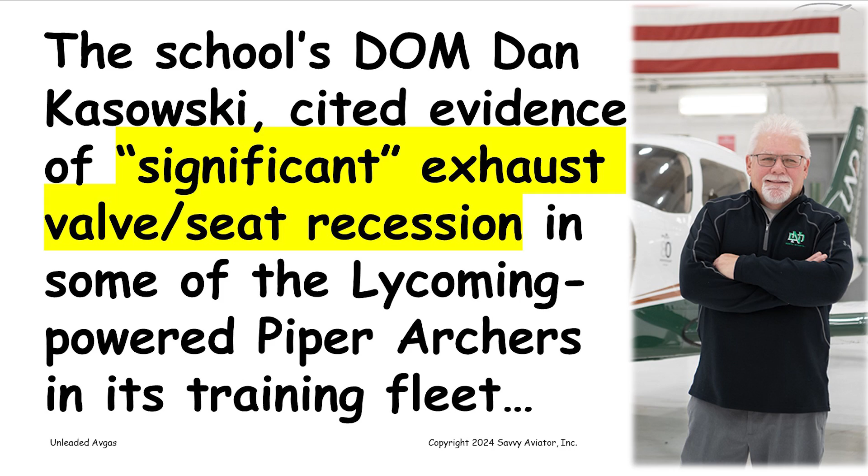And we wanted to find out why. When UND announced that they were going back to 100 low lead, the director of maintenance put out a press release citing that they had evidence of significant exhaust valve seat recession in some of the Lycoming-powered Piper Archers in its training fleet. The director of maintenance went on to say that they were pulling the plug on the Swift UL94. Didn't really provide any more information about what significant recession meant, how significant it was. And we now have some more information about that, but not as much as it would be nice to have.

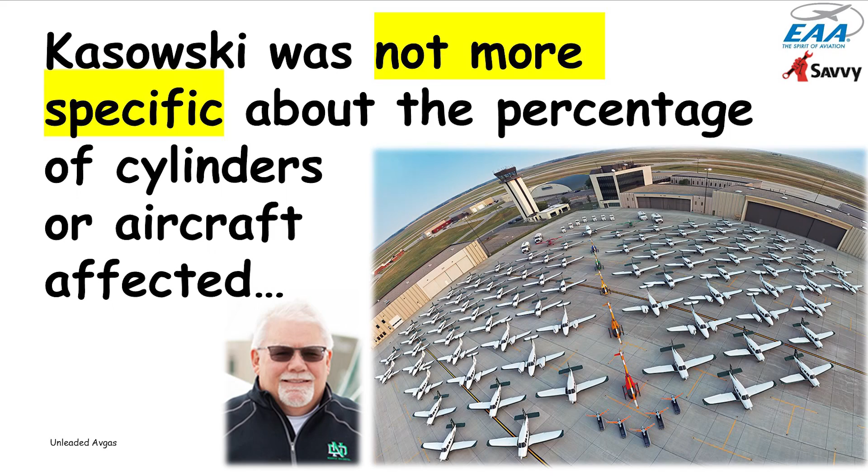So this got a lot of us looking at this whole question of valve recession and whether leaded fuel is required to avoid valve recession, and so on. A couple of weeks ago, we got some more information. The new dean of the UND School of Aerospace Sciences, Dr. Krause, reached out to me and sent me some more specific information that helped quantify the problem a little bit and gave an idea of just what a large test this was. And I'll run over some of that information with you right now.

This is the latest information that we have. At any rate, the UND fleet, UND has 1,600 primary flight students, so it's a very big flight school, one of the largest in the country. Their training fleet consists of 86 Piper Archers and 14 Piper Seminole twins, plus 5 Robinson helicopters, which I don't think were part of this. They put on over 100,000 hours a year on these airplanes. In some months, when they're peak flying months, they'll sometimes exceed 13,000 hours per month.

And some of their aircraft will fly in excess of 1,200 hours per year. So they fly the heck out of these airplanes. They put a lot of hours on it. They use a lot of fuel, and they're all 4-cylinder Lycoming engines in these Archers and Seminoles.

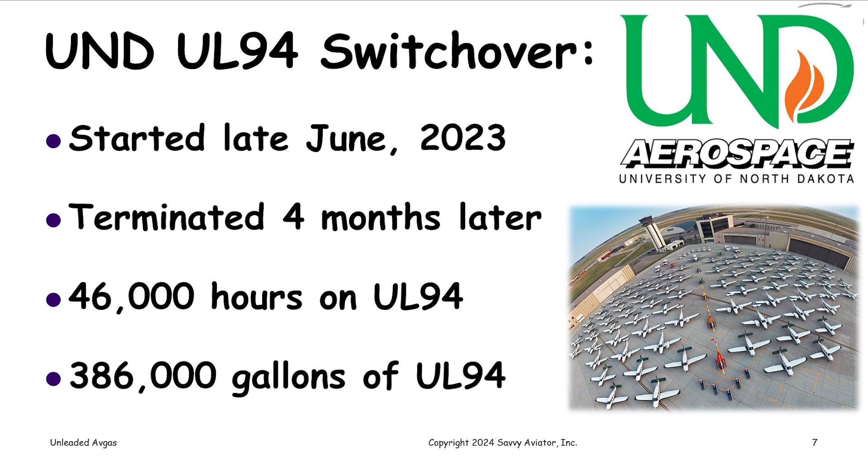All of these airplanes are powered by 4-cylinder Lycomings, O360s in the Archers and IO360s in the Seminoles. Their leaning protocol, they basically run the airplanes full rich, except for cross-country operations. And in cross-country cruise, they operate them at peak EGT, which is apparently what the Piper POH calls for.

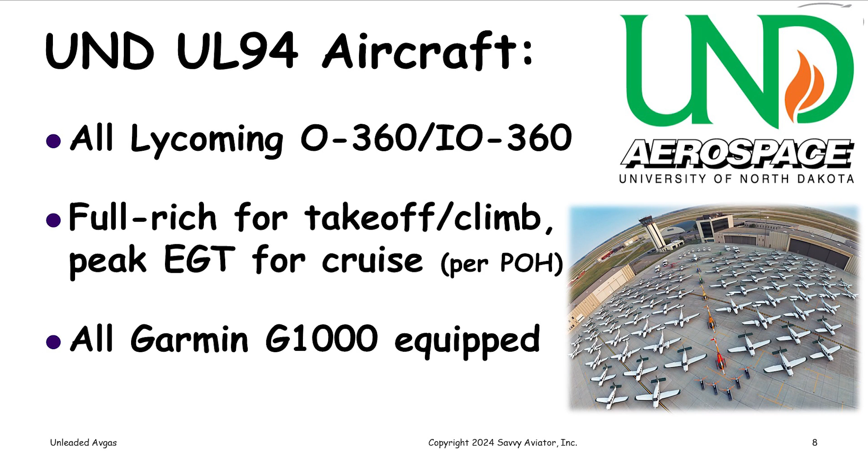All of these airplanes are Garmin G1000 equipped, so they log a lot of data, and they have a pretty comprehensive telemetry system where all this data is gathered together in a database where they can do a lot of analysis on it. And again, this is quite a large fleet.

So the problem started. Remember that they switched over to the fuel in June of 23, and in late August they had one of their Seminoles. The pilot experienced a vibration, and when he looked at the engine monitor page on the G1000, one of the cylinders on the left engine was showing significantly lower EGT than the others, like 500 degrees lower than the others. So the pilot decided to abort the mission, return to base.

And they put the airplane into maintenance. And when they did a borescope inspection on the cylinder that was showing low EGT, they observed severe recession of the exhaust valve seat. They wound up replacing that cylinder and putting the airplane back on the line.

Now, valve seat recession occurs when the valve seat, which is an insert that's pressed into the cylinder head, wears away, so that the valve closes further into the head than normal, and if it wears away far enough, there'll start to be leakage, and the valve will start to burn.

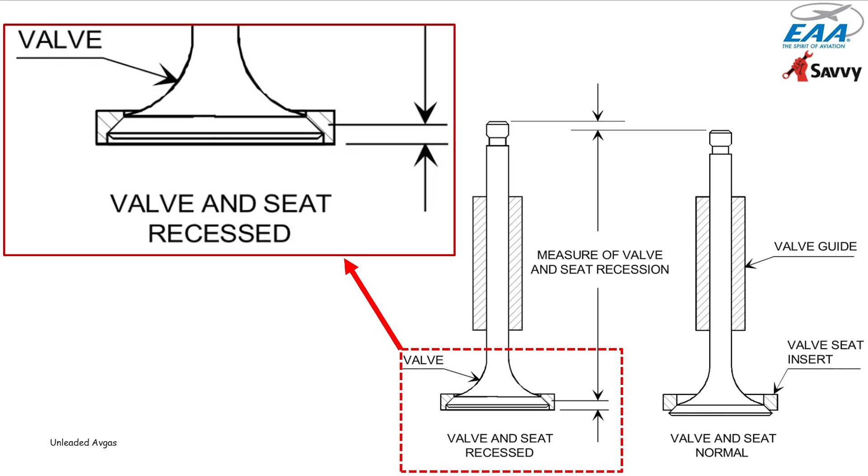None of the other cylinders on that engine and none of the cylinders on the other engine on the Seminole exhibited this, just this one cylinder. But it was quite severe. It was pretty obvious why the engine was running rough and had the abnormal EGT indication.

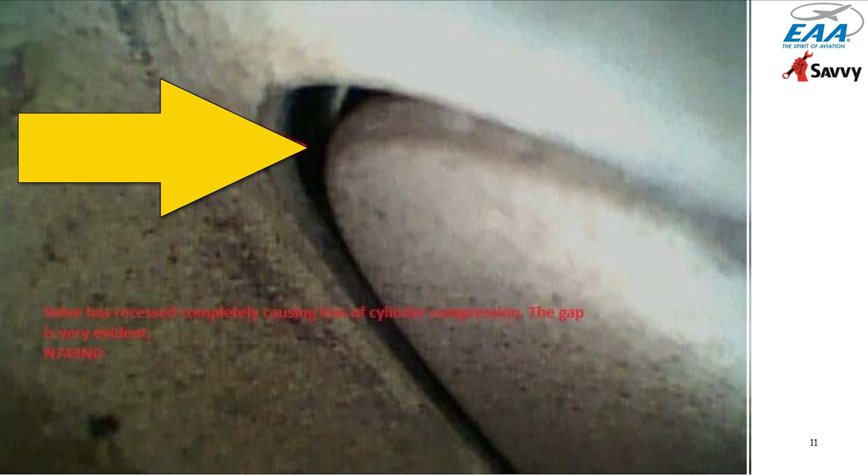So once this happened, they started looking for valve seat recession, and over the next 2 months, they discovered 11 additional cases of valve seat recession. Now, as far as I know, none of them caused operational problems. They didn't discover them because of a rough running engine or anything like that.

They discovered them in the course of doing inspections of the aircraft. These aircraft all come in for 100-hour inspections, and of course, if the airplanes are flying 1,000 hours a year, they do a lot of 100-hour inspections in the course of a year. So, at any rate, they found another 11 cases of valve seat recession, presumably much less severe than the one on the Seminole.

And as a result of that, they made the decision to return to 100 low lead fuel. They then inspected all 114 Lycoming engines in their fleet. They discovered an additional 9 cases of recession.

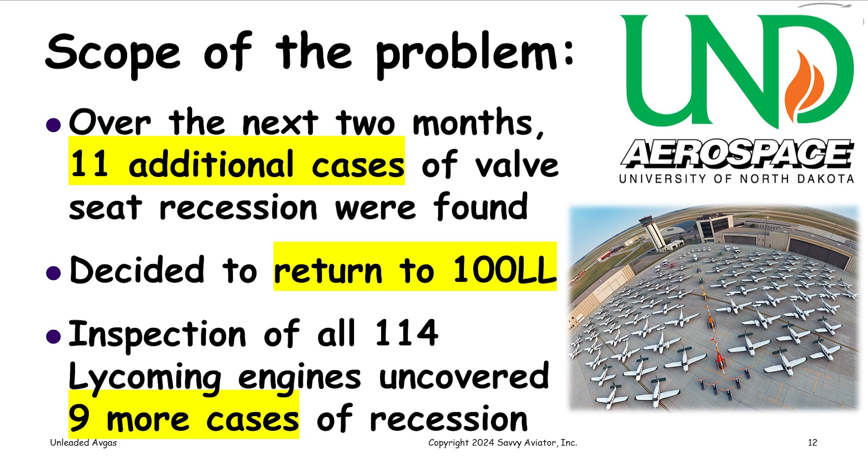And again, we don't know how severe the recession was. As far as I know, none of them caused operational problems. Some of them caused some loss of compression, but we don't know how many. So anyway, in total, they found 21 cases of exhaust valve seat recession detected out of the 456 cylinders in their 114 engines in this fleet.

Then they said, since returning to 100 low lead, they kept looking, and the number of cases of valve seat recession, they say, have grown to 128. But again, we don't know how much seat wear it took for them to call it a case of valve seat recession.

Talk a little bit more about some of the methodology they used to measure recession. They indicated that most of the cylinders in which valve seat recession was detected had more than 400 hours before the recession became detectable, or a compression loss was detected that was attributable to valve seat recession.

And then they made the comment that none of the replaced cylinders have exhibited valve seat recession so far, but if I do the math, I don't think any of the cylinders that they replaced have gotten to 400 hours yet. So that may not really mean that much.

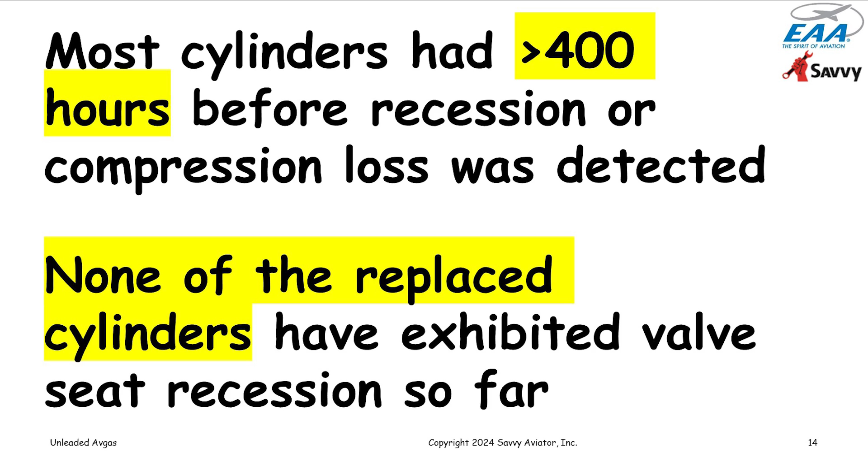Any rate, so UND is back on 100 low lead. They're continuing to study data from their G1000s to try to figure out whether they can find any correlation in terms of which engines or in which cylinders had the valve seat recession problem.

They've got a ton of data from the G1000. They're looking at whether airplanes that did a lot of cross-country flight with a lean mixture had more or less recession than airplanes used in the practice area and pattern where they were running full rich.

Another wrinkle is that airplanes on long cross countries would typically refuel with 100 low lead while away from home, since they could only get 94UL at home base. So they're trying to see if there's a correlation with recession - whether airplanes that refueled with 100 low lead during long cross countries suffered less recession or no recession.

They're also looking to see whether the number of takeoffs and landings, the number of max power cycles on the engine, correlated with valve seat recession. That's apparently an ongoing study.

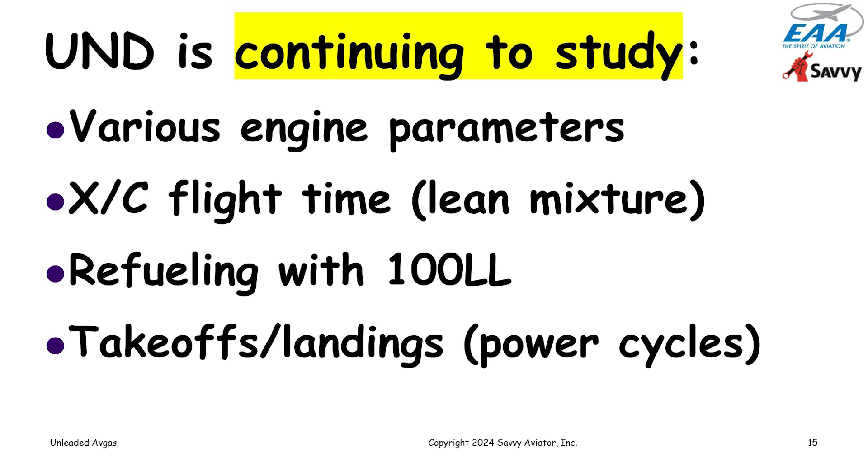Now we were pretty taken aback by what UND found here, because there'd been so much testing of unleaded fuel in piston aircraft engines before, and pretty much everything we'd seen in the past had indicated that switching to unleaded fuel was all positive with no negative. So this was really the first thing that came up indicating there might be a problem.

We have decades of experience using unleaded automotive fuel in a wide range of low compression aircraft engines, ranging from the O-320s like in Cessna 172s to Continental O-470s in Cessna 182s, and basically never really had any problem using unleaded MOGAS in the low compression engines that qualify for the MOGAS STC.

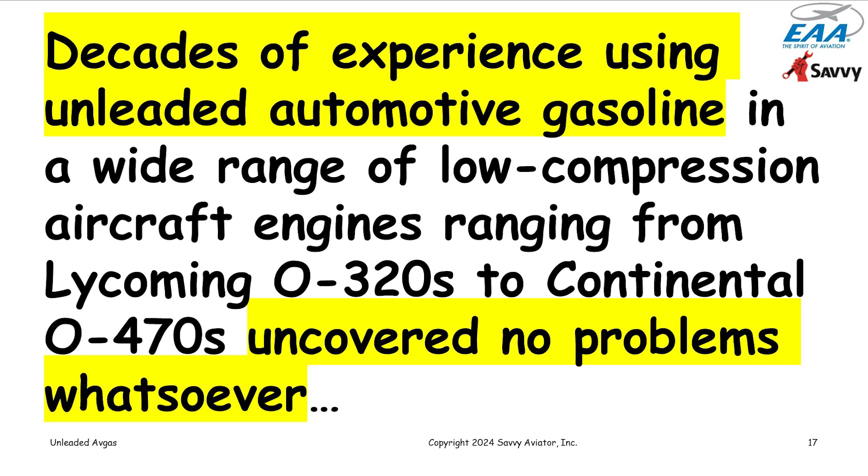So what came out of UND was very surprising, and everybody started saying, is this a major setback for the transition to unleaded fuel, or is it just a blip? We don't have all the answers to that yet, but I do want to tell you what we do know, because we do know quite a bit.

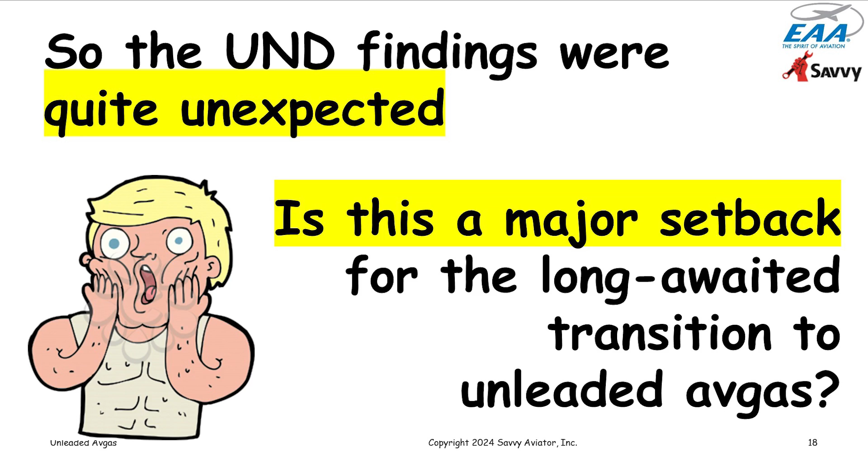So a little bit of background on this whole question of valve recession and unleaded fuel. The first experience people had with this was in the automotive world, because the EPA started the transition to unleaded automotive fuel back in 1974, when they mandated that unleaded fuel be universally available. What prompted this was that cars started being built with catalytic converters, and the use of leaded fuel would destroy the catalyst and catalytic converter.

So if you had a newer car with a catalytic converter, you had to use unleaded fuel or you'd destroy it. Catalytic converters were first introduced in 1975 model cars, so the EPA mandated that all gas stations have unleaded fuel available in 1974.

And for quite a while, they were selling both leaded and unleaded fuel. If you had a newer car with a catalytic converter, it had a restricted fuel opening, so you couldn't fuel it, or at least it'd be difficult to fuel it with leaded fuel that would destroy the catalytic converter.

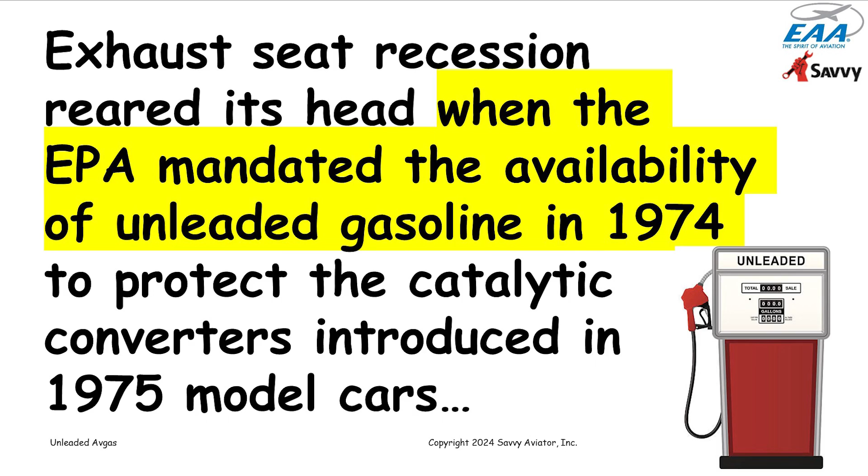In 1996, they completely banned leaded MoGas and switched over totally to unleaded fuel for on-road vehicles. And when that happened, the problem of valve recession started to show up in older cars that were designed to run on leaded fuel.

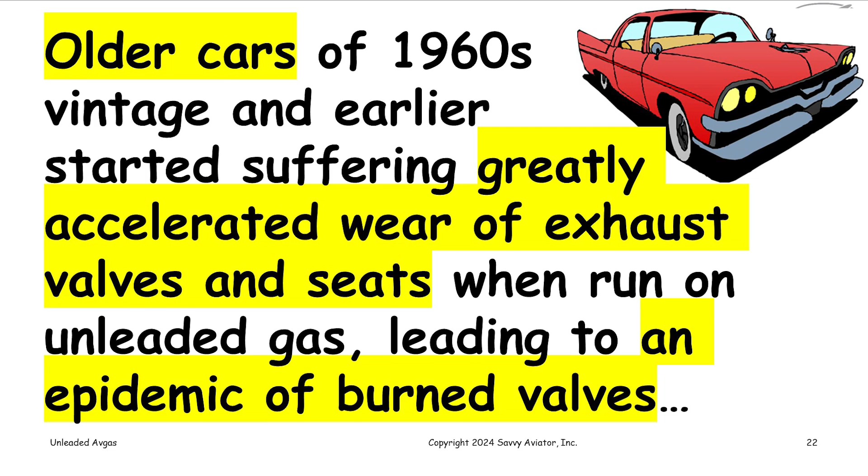It turned out that cars built in the 60s and earlier tended to have valve seat recession problems when forced to switch to unleaded fuel, but later model cars didn't have that problem. It turned out the difference had to do with the metallurgy of the valve seat inserts they used - the later model cars were built with hardened valve seats.

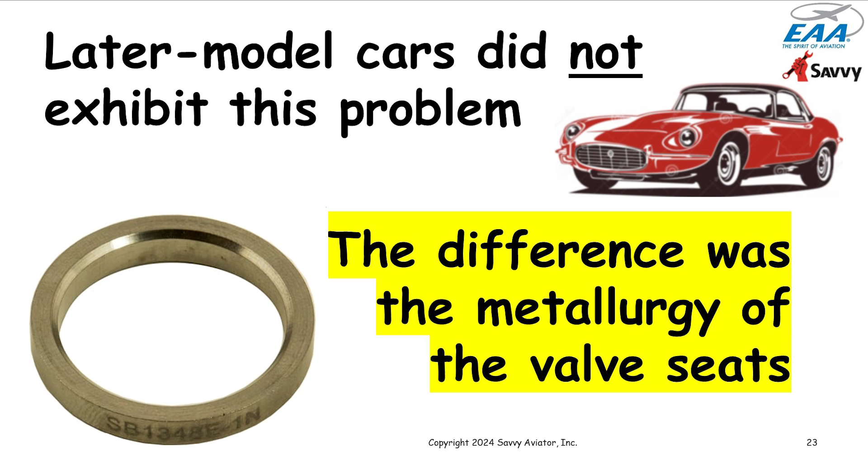But the earlier model cars either had no valve seat inserts at all and had the valve seat machined right into the cylinder head casting, or else they had valve seat inserts made out of relatively soft material. So engines with soft seats suffered quite badly from valve seat recession when they switched to unleaded fuel, but ones with hardened seats didn't have that problem. So the hardness of the seat made a huge difference.

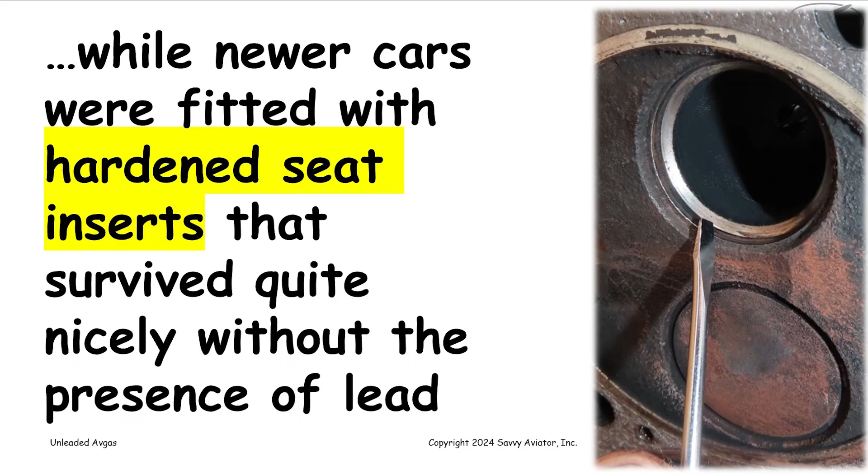So now we're in the process of going through with our piston aircraft engines what the cars had to go through back in the 90s when leaded fuel was removed from the market. And hopefully we've learned some things from the car experience, so we don't have to reinvent the wheel.

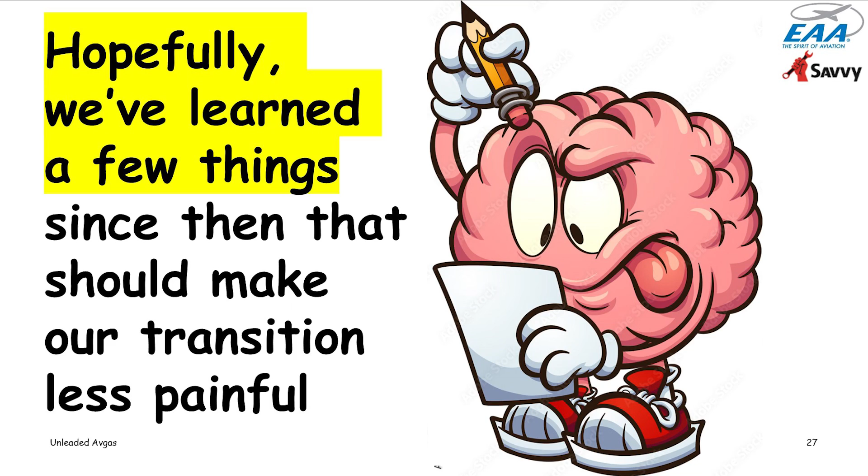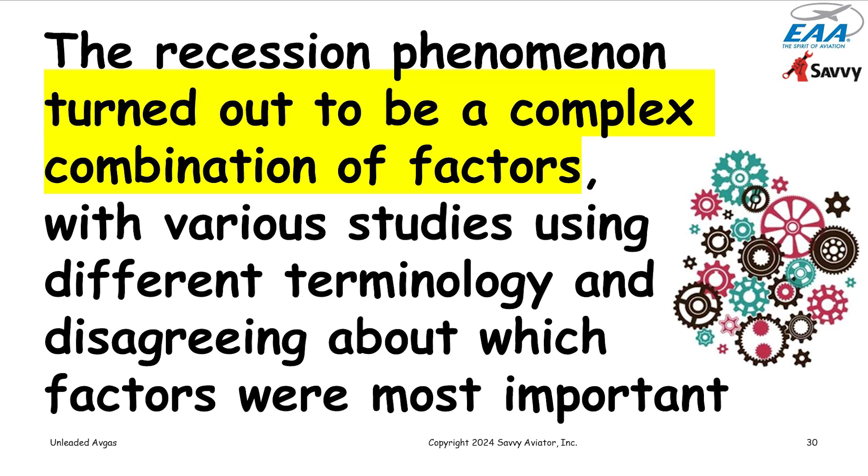So what causes recession? Well, a lot of studies were done when we were going through all of this trauma with automobiles, in university laboratories. Major oil companies published papers on it, and there's quite a bit written on it. If you read it all, it gets a little confusing because not all the researchers agreed completely on the causes, and they used a lot of incompatible terminology. But the consensus seemed to be that valve seat recession

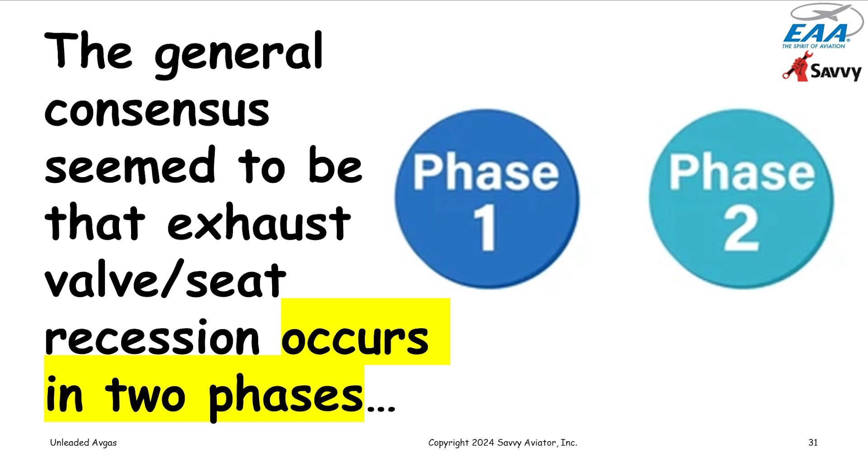occurs in two phases. The first phase is where the pressure of the valve face, the sealing surface of the valve, pressing against the valve seat causes what's called micro-welding. This is the same phenomenon that causes friction when metal parts move against one another. The pressure of the valve against the seat causes micro-welding between the two surfaces that, when the valve opens again, results in material transfer between the sealing surface of the valve and the sealing surface of the seat. And when there's enough of this micro-welding, eventually those surfaces become rough and abrasive.

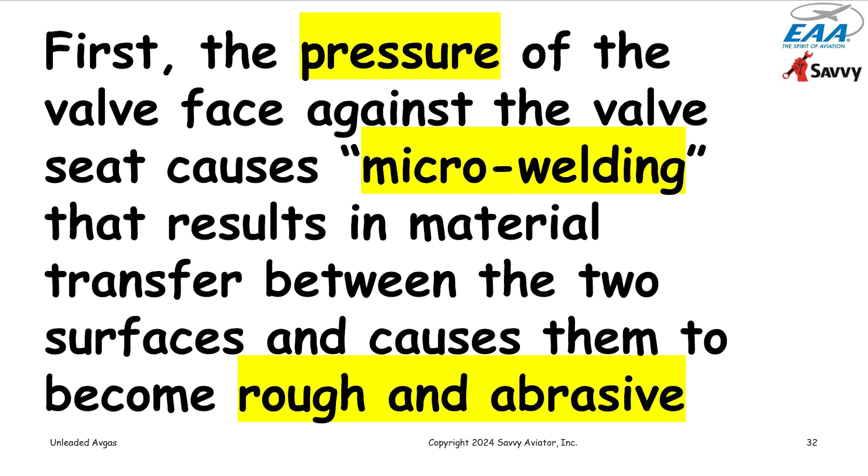Then once these surfaces have become roughened through this micro-welding process, the sliding action of the surfaces against one another starts to abrade either the valve face or the seat, and usually the seat is the one that wears down, and it basically grinds it down.

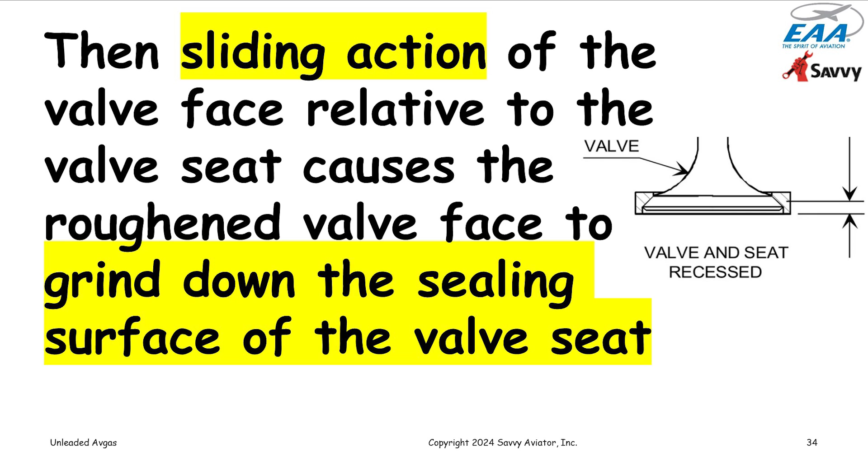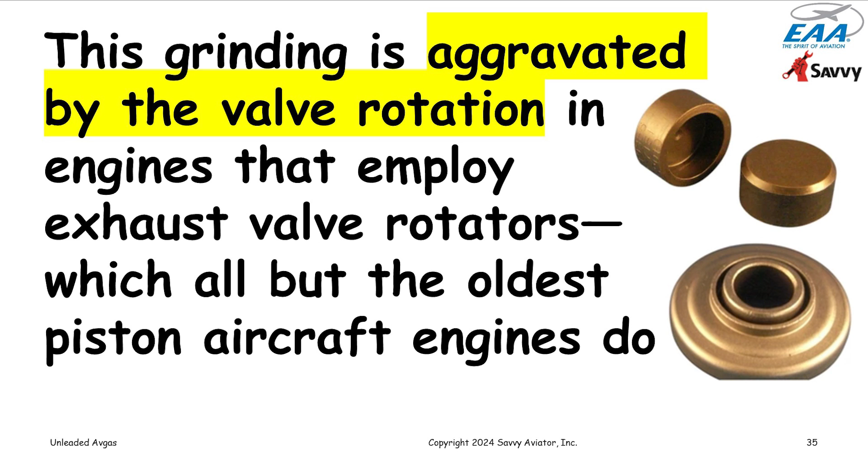This is aggravated additionally if the engine uses exhaust valve rotators, which the majority of piston aircraft engines do. The rotators cause the heat distribution on the valve to be evened around the circumference, and also help keep the sealing surfaces clean of deposits. But if the sealing surfaces are rough, the rotation of the valve can also aggravate valve seat recession.

Now, there are two things that affect the micro welding of these two surfaces. It can occur either at the moment of impact as the valve closes into the seat, or during the combustion event at the moment of peak pressure, where the high pressure inside the combustion chamber is pressing the valve against the seat. In automobile engines, the impact is significant because they're high revving engines and the valves open and close quite rapidly. In aircraft engines, which rotate quite slowly, the impact is quite modest and probably not a factor in micro welding. It's really the peak combustion pressure pressing the valve against the seat that's responsible.

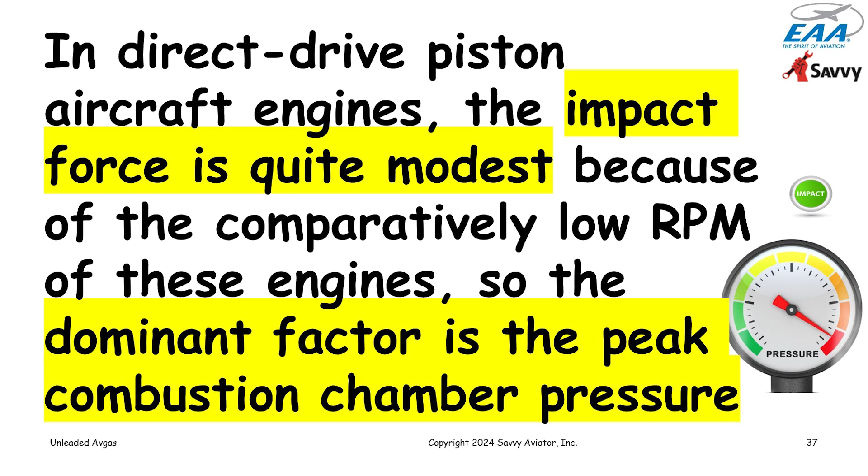So this peak pressure, which is the thing that causes the problem, is increased by several factors. The higher the compression ratio, the greater the pressure pressing the valve against the seat. The more aggressive the ignition timing, the higher the peak pressure, and also the lower the fuel octane, the higher the peak pressure. So all three of these things aggravate the problem of micro welding and tend to increase the likelihood of valve seat recession.

As it turns out, these engines in the Piper Archers have all of these negative factors going against them. They're high compression engines, 8.6 to 1 compression ratio. They have very aggressive ignition timing, 25 degrees before top dead center. And the Swift fuel, rated at 94 octane, is a lower octane fuel than what they had been running on before. With lower octane fuel, the flame front propagates more rapidly, and the peak pressure occurs sooner - basically the pressure curve is peakier, or the peak pressure is higher with lower octane fuel. So these engines had all three of these factors going against them.

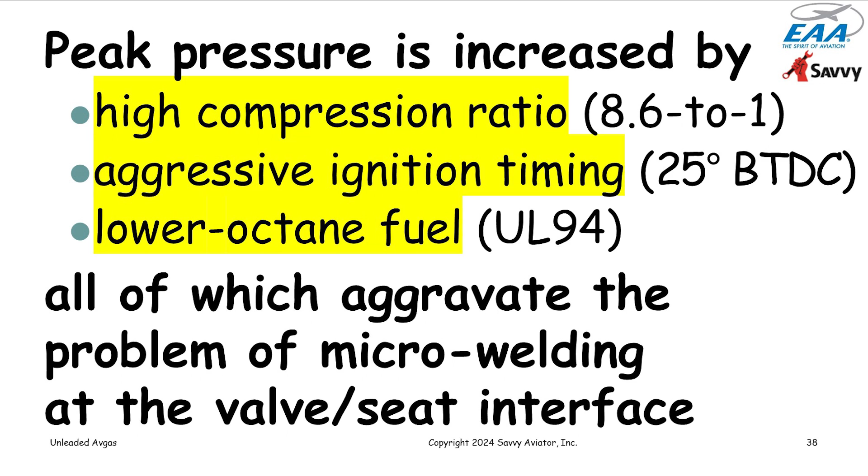Now, micro welding can be mitigated in two ways. It can be mitigated chemically - in the studies done in the automotive world, there was pretty good evidence that lead oxides do inhibit micro welding. Or it can be inhibited metallurgically by making the valve seat out of a hard material that resists micro welding. So that's why the older cars could get away with softer seats, because the lead in the fuel was helping chemically reduce the micro welding, whereas once the transition to unleaded fuel was made, it was important to have hardened valve seats, and the earlier model cars that didn't have hardened valve seats were suffering.

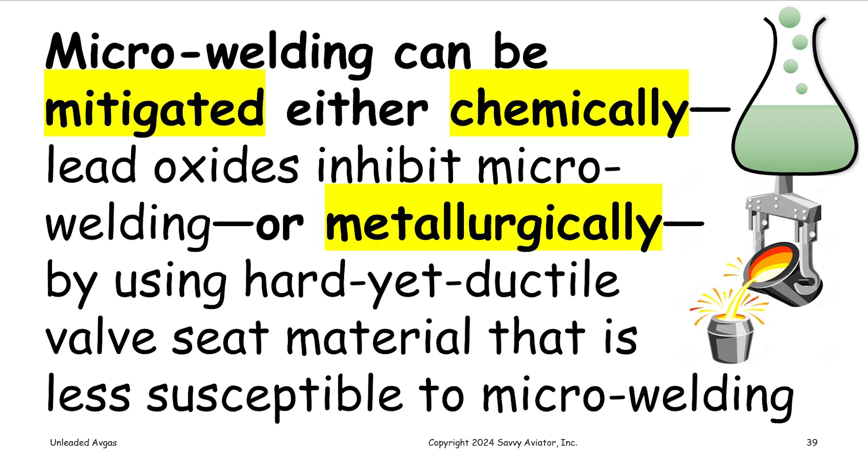So in the aviation world, the same thing. Leaded avgas or hardened valve seats should help minimize micro welding. So then the question is, how hard are the seats in our aircraft engines? And as far as we can tell, Lycoming switched to hardened valve seats more than 30 years ago.

So virtually all of the Lycoming cylinders in the field should have hardened valve seats that theoretically should do just fine on unleaded fuel. And Lycoming approves the vast majority of their engines for use on unleaded fuel.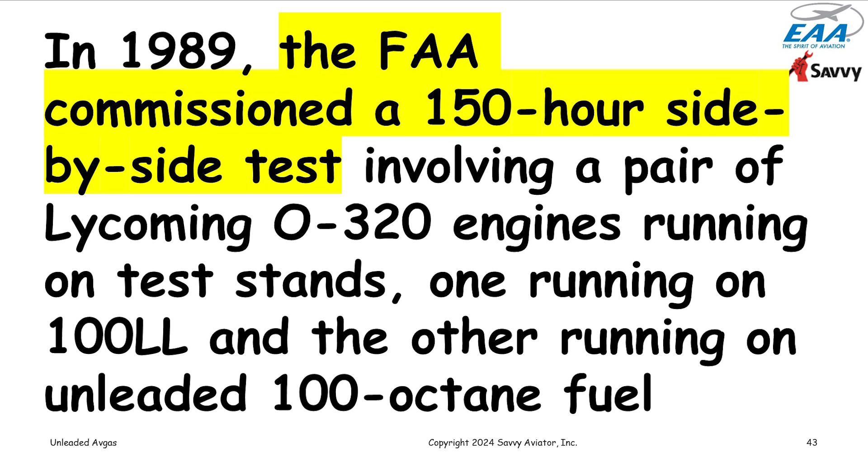On the other hand, the O-320 was not a high compression engine, and the test was only 150 hours. And what UND was saying was that they weren't really finding valve seat recession in cylinders that had less than 400 hours. So it may be that this test just wasn't long enough and wasn't difficult enough.

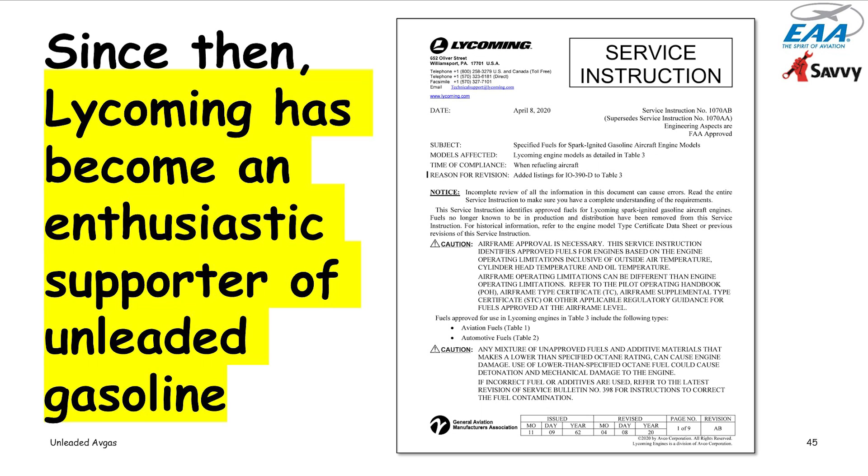Lycoming has become an enthusiastic supporter of unleaded fuel. They issued a service instruction in April of 2020, service instruction 1070 Alpha Bravo, which lists basically every engine that Lycoming makes. It's a big giant matrix that lists all the engine models that Lycoming makes and all of the fuels that each engine is approved to run on.

And if you look through the service instruction, it turns out that the overwhelming majority of Lycoming engines are approved for both UL94, which is what the Swift makes, and UL91, which is apparently an unleaded avgas available in Europe. And an awful lot of them are also approved for use on premium unleaded automotive fuel.

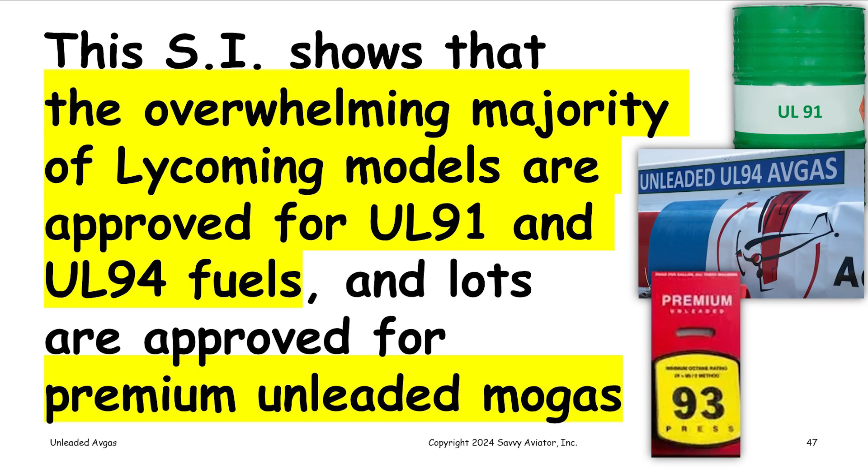In contrast, Continental is kind of the very opposite. They're very late to the unleaded party. Paul Bertorelli did a really good investigative report in AvWeb some months ago, and according to Paul's research, Continental didn't switch to hardened exhaust valve seats until 2019.

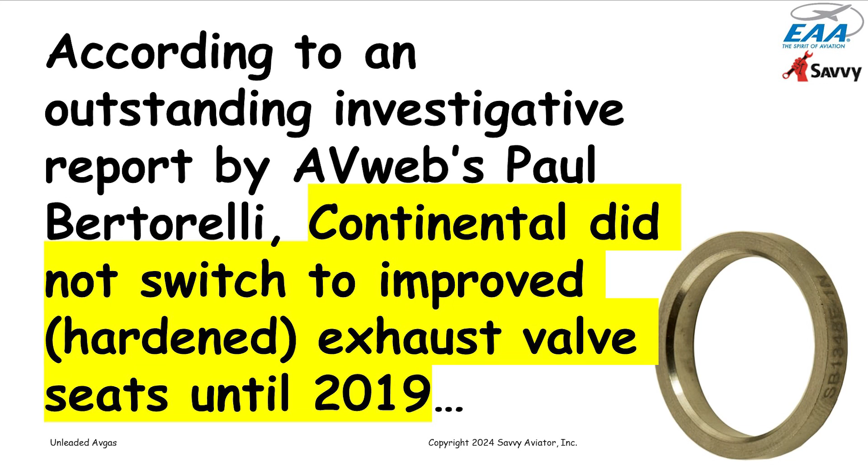So that means that there are probably a lot of Continental cylinders out there that have non-hardened seat inserts that are still in the field. Although all new cylinders that were built since 2019 apparently have hardened seats.

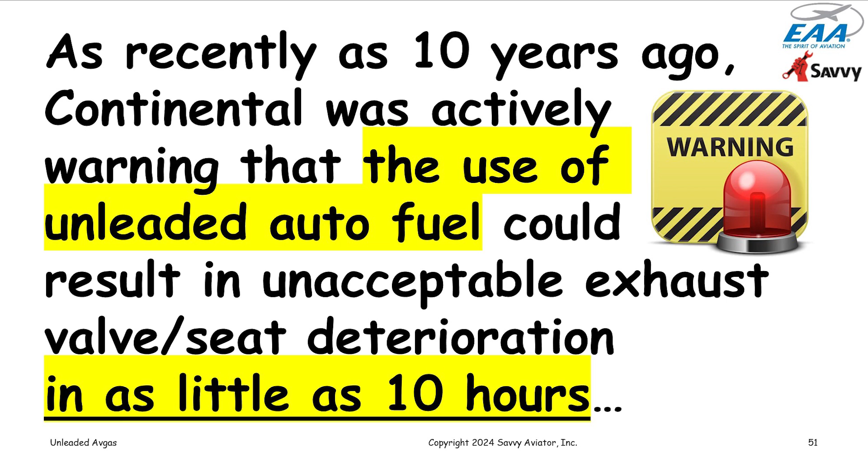Also, Paul's report indicated, interestingly enough, that as recently as 10 years ago, Continental had a very nasty looking warning on their website, warning that the use of unleaded fuel in Continental engines could result in unacceptable exhaust valve seat deterioration in as little as 10 hours, which seems a bit hyperbolic, given the fact that we've got a lot of history of running low compression Continental engines on unleaded MoGas in the field without any problems.

They got a lot of Cessna 182s, for example, running MoGas in O-470Rs and S's without any issues, without any valve issues.

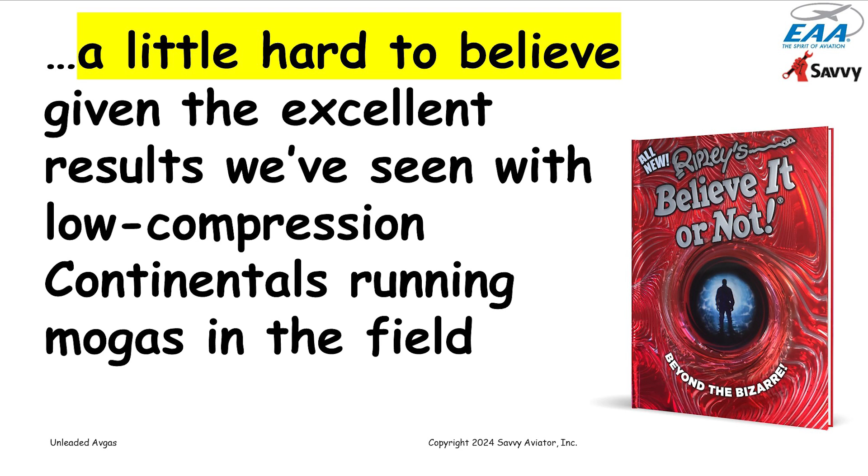Continental took that warning down, but they have not approved the use of unleaded fuel in any of their engines so far.

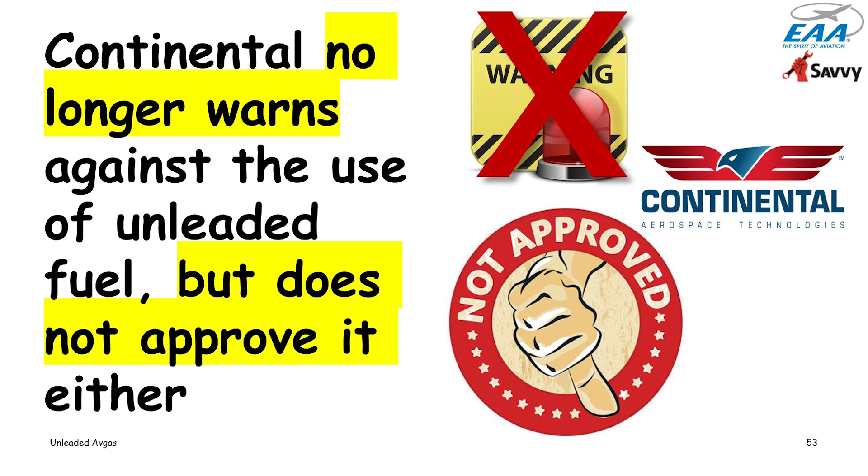And according to what I heard from GAMI, Continental has so far declined to do any testing or give approval for G100UL, despite the fact that the FAA issued an STC that approves the use of G100UL in virtually all Continental engines and virtually all Lycoming engines.

So Lycoming has been very enthusiastic about unleaded fuel, and Continental has been pretty much the opposite. Not sure why that is, but that just seems like an interesting contrast.

Prior to obtaining the STC, GAMI performed more than 700 hours of endurance testing involving both Continental and Lycoming engines with no evidence of exhaust valve seat recession running on G100UL. And I imagine by now they've done quite a bit more than that 700 hours.

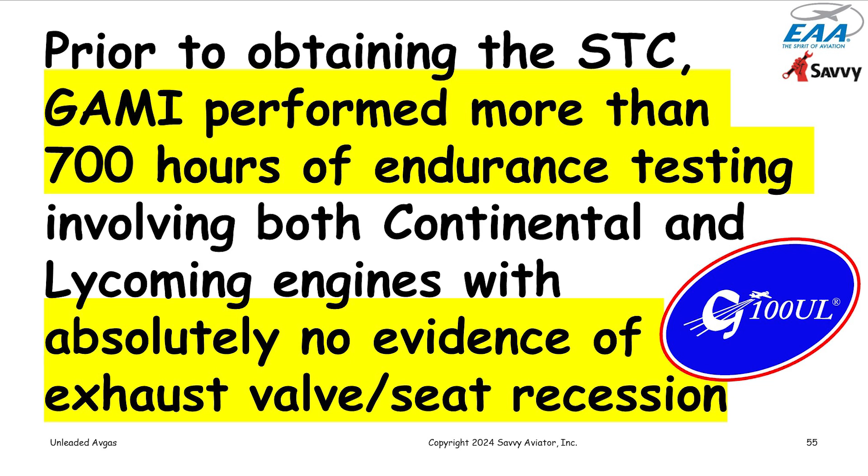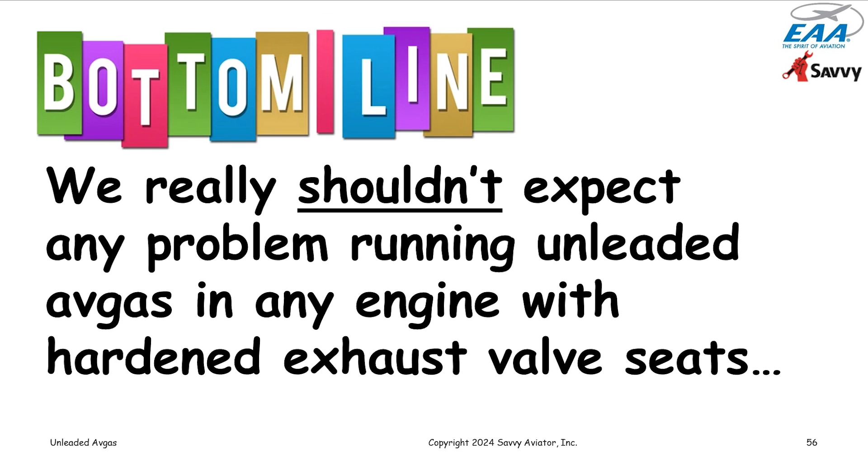So the bottom line is we really shouldn't expect any problem running unleaded avgas in any engine with hardened exhaust valve seats, which would mean any Lycoming engine pretty much, and any Continental engine with cylinders built in 2019 or later. And there's an awful lot of anecdotal evidence that low compression Continentals, even without the hardened seats, are doing just fine on unleaded MOGAS.

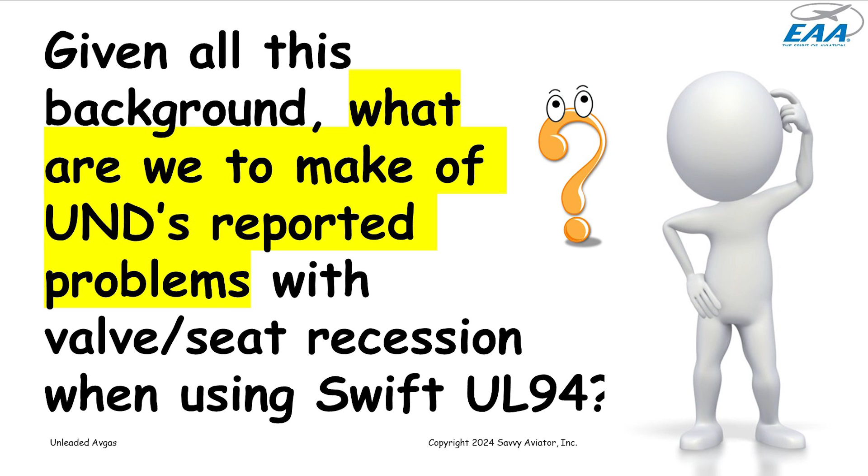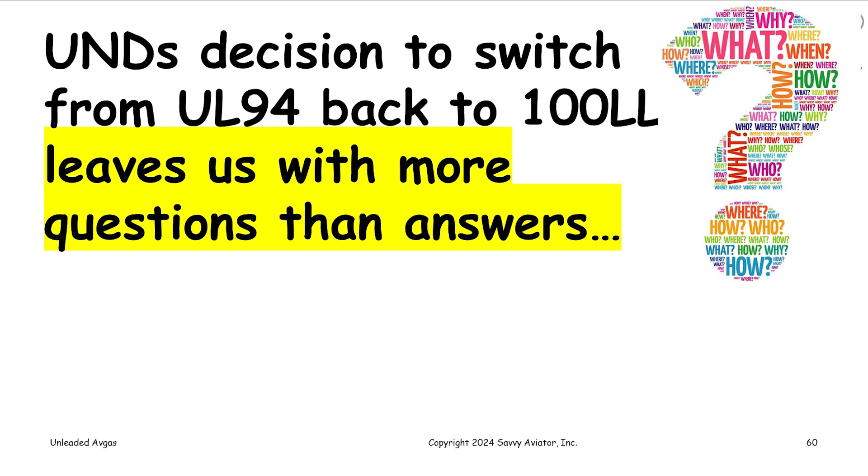So given all of this background, it's a little bit of a head scratcher as to what was going on with UND, and why they ran into this problem. And it's something that leaves us with more questions than answers. One of the questions is just how significant was the recession that happened at UND, and were they too quick on the trigger to terminate the test or not?

Did UND experience a substantial increase in the number of in-flight engine issues? We're really only aware of the one issue with that one cylinder in the Seminole.

Did they experience a substantial increase in the number of burned exhaust valves attributed to valve seat recession? Did they experience a significant increase in the number of cylinders that had to be changed? What were their criteria for deciding to take a cylinder out of service because of this? And how much downtime of the aircraft did they attribute to these recession problems?

We really don't know. None of this has been quantified yet by UND, at least in terms of what they've been willing to share with us. I know they've shared a bunch of data with Lycoming. Lycoming has been quite silent on the subject.

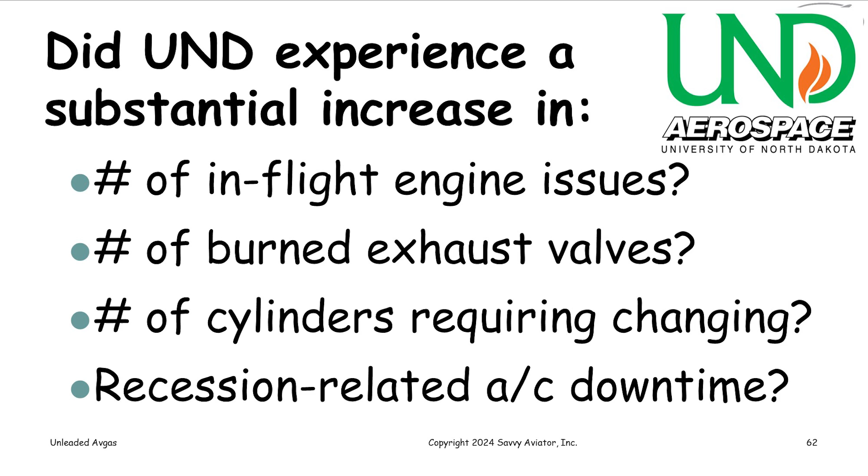I think they're all trying to figure this out. But it kind of leaves a question of how much of the problem that caused UND to terminate its use of Swift UL94 was actually based on operational disruption versus some sort of technical measurement. And the second question is, how exactly did UND measure recession? How did they determine what was significant or not? The information we got from the director of maintenance at UND was that the way they measured valve seat recession was via the measurement of dry tappet clearance.

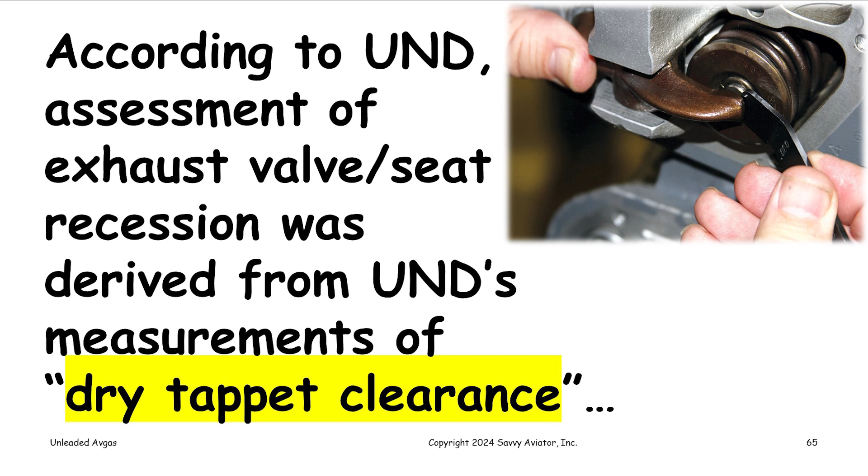Which struck me as a very puzzling way to measure valve seat recession. So let me talk for a minute about dry tappet clearance.

Here's kind of what the valve train looks like on the Continental or Lycoming engine. This one looks more like a Lycoming because it's got a mushroom style lifter. The valve train has a whole bunch of components working together, and there's a certain amount of mechanical slop in the system that the hydraulic lifter removes. The thing labeled tappet here has a little hydraulic mechanism in it that gets pumped up with engine oil and eliminates the slop or the lash in the system.

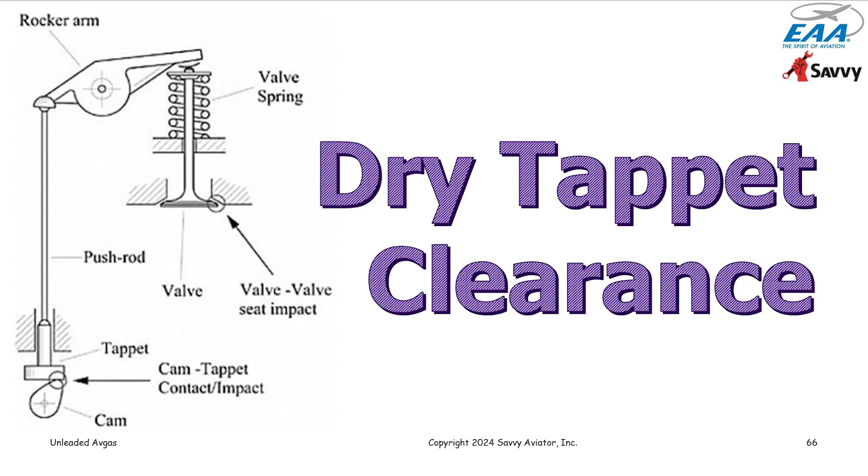So there's a measurement called dry tappet clearance, which measures how much slop there is in that system when the lifters have no engine oil in them at all, or are completely bled down, completely flat. And that's apparently the measurement that UND was using to determine valve seat recession.

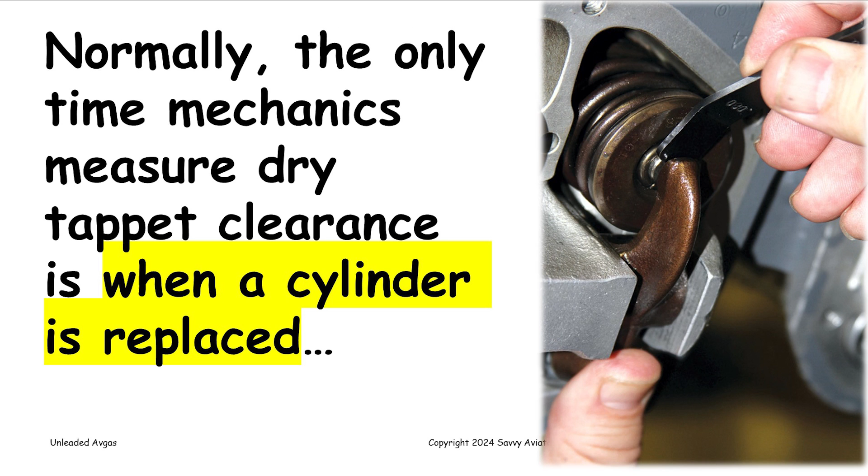And it strikes me as an unusual way to do it, maybe not a really good way to do it, because dry tappet clearance is a measurement that normally is only done when a cylinder is replaced, and the purpose is to make sure that the amount of mechanical slop in the system is within the range that the hydraulic lifter can compensate for when it's pumped up with engine oil. If the dry tappet clearance was too large, then it's possible the valve might not open all the way. If the dry tappet clearance is too small, it's possible the valve might not close completely.

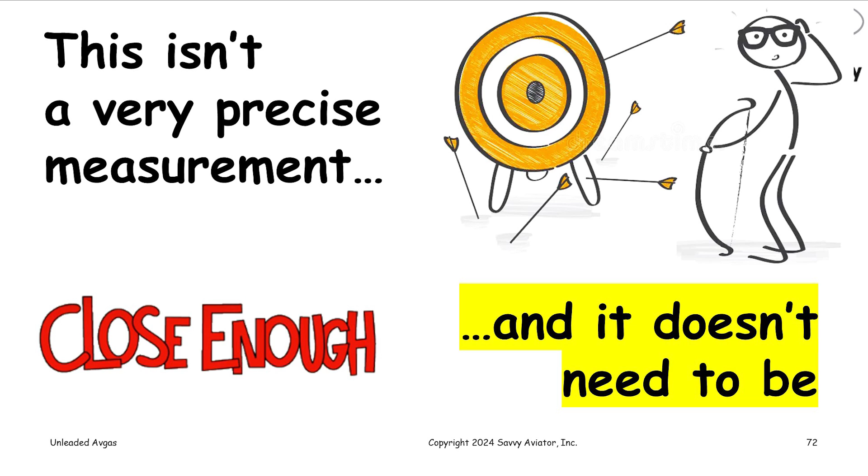But this is not a very precise measurement. It's kind of a ballpark measurement, and it doesn't have to be very precise. Lycoming's dry tappet clearance spec, and this is true of Continentals as well, is wide enough to drive an 18-wheeler through. Anything between 28 thousandths and 80 thousandths of an inch of slop in the system is acceptable, is within the range. So we just need to make sure that the slop is somewhere in that very, very broad acceptable range.

And the only time that would be likely to get out of tolerance would be when you change a cylinder and change the geometry of the system. If a mechanic replaces a cylinder and measures the dry tappet clearance and it's outside of this range, which doesn't happen very often because the range is so wide, the cure is to install an approved undersize or oversize push rod that will bring that slop within that broad acceptable range of dry tappet clearance, so that when the lifter pumps up, it can take all the slop out of the system.

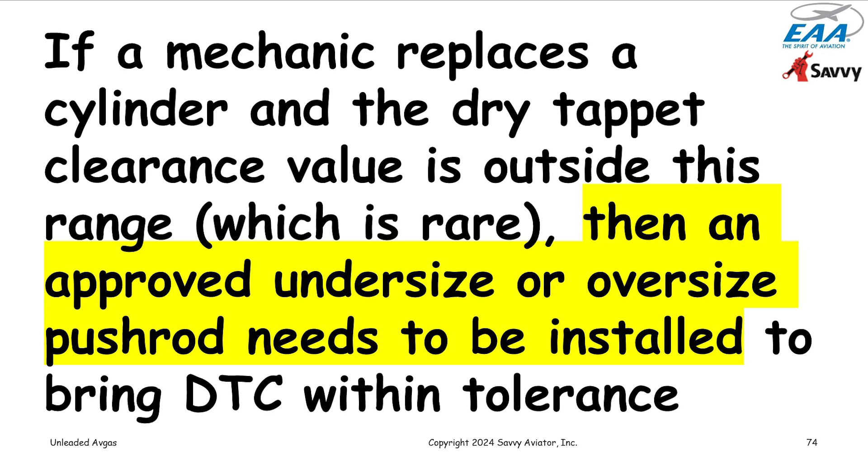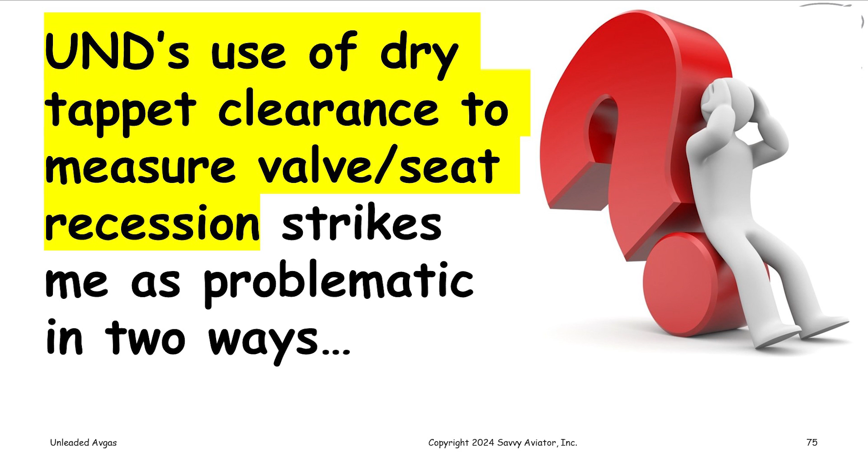So UND's use of this dry tappet clearance as a means to measure valve seat recession strikes me as problematic in two ways. First of all, the things that make up dry tappet clearance, there are a lot of pieces and parts that add up together to determine the slop in the system. Valve seat recession would be only one of those things.

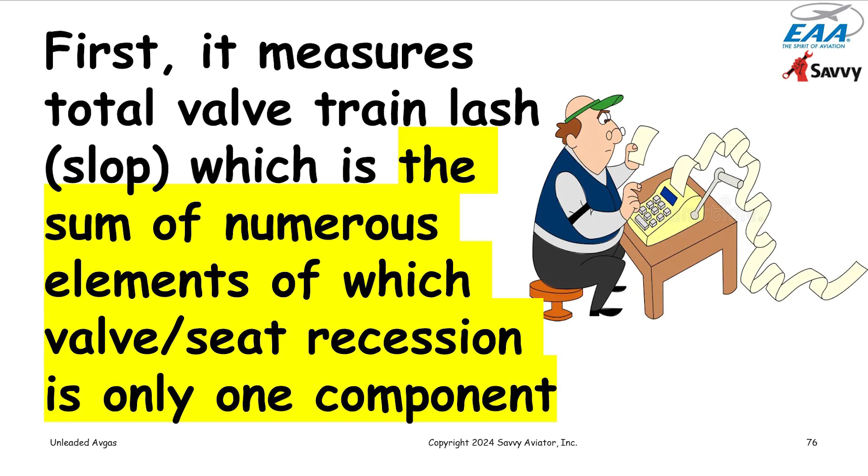And typically they wouldn't have had records of what the dry tappet clearance is for each of those cylinders, because when you install a cylinder, you typically check the dry tappet clearance and make sure it's within the range, but you don't really write down what it was, because you're only interested in making sure it's somewhere in that very broad range, and that you don't have to change the push rod to an oversized or undersized push rod.

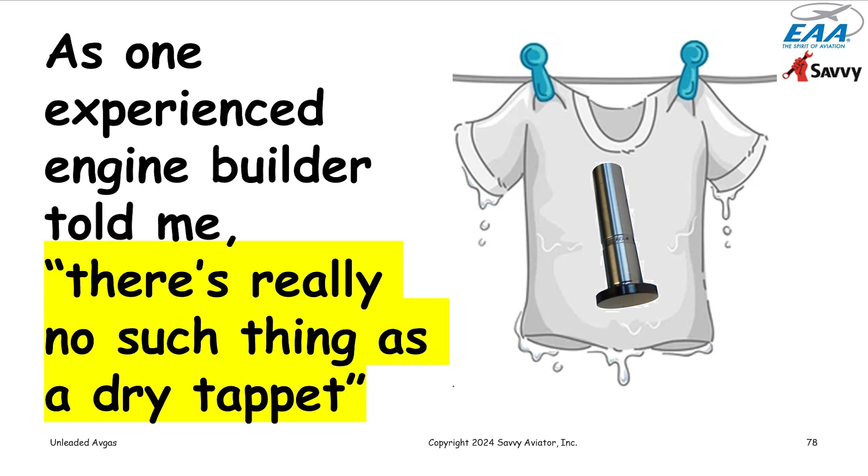But in order to measure dry tappet clearance on a cylinder that's in service, you have to make sure that the lifter is completely bled down and that there's no liquid in the lifter at all. That's not an easy thing to do. As one very experienced engine builder told me, there's really no such thing as a dry tappet. The only way to really ensure it's dry would be to take the lifter body apart, clean it all out with a volatile solvent, make sure the solvent all dried, and put it all back together. That's not something that would be likely done while on an engine that's in service. It's only the kind of thing that would be done when a cylinder is being changed. So it's a strange way to do this measurement.

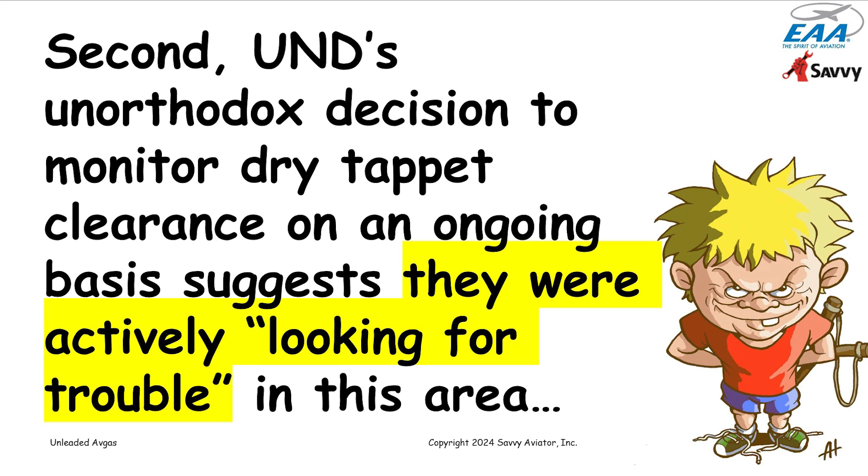Second of all, the fact that UND decided to start measuring dry tappet clearance during 100-hour inspection, something that is not a normal procedure at all, suggests to me that they were actively looking for problems in this area, despite an awful lot of testing in the past by Lycoming and the FAA and so on that indicated that it shouldn't be a problem. That raises an obvious concern about whether they were looking too hard for this problem.

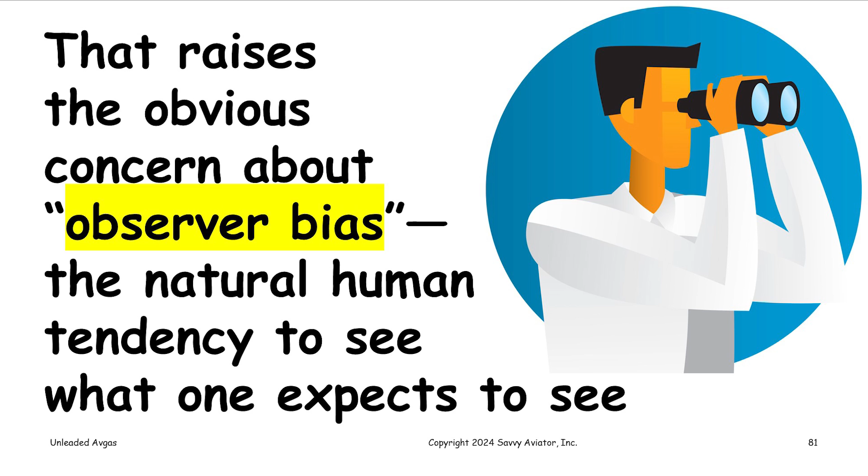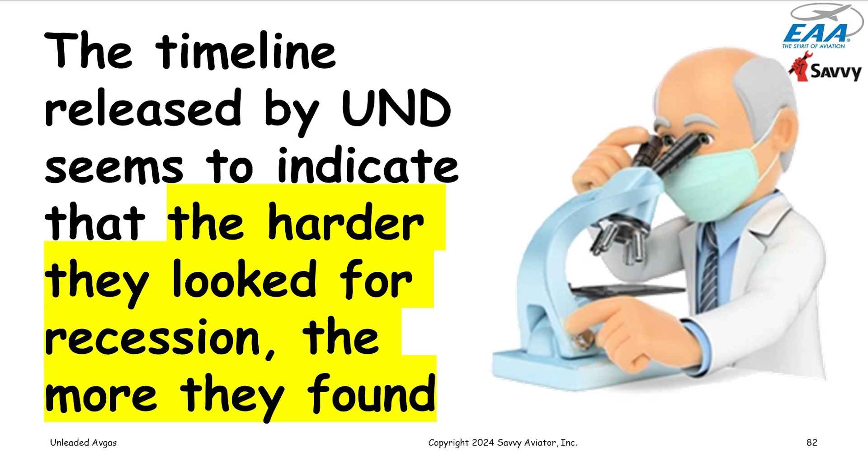Once they had the one problem with the Seminole, they really started looking for recession very hard, and it seemed like, based on the chronology I gave you earlier, the harder they looked, the more problems they found. It really makes me wonder whether they just got a little gun shy on this problem, and whether it wasn't operationally significant. It was more something where they just kept looking for it, because a certain amount of valve seat recession is probably normal, and there really wasn't any control group to compare with here. So I'm not saying there was observer bias, and I'm not saying the problem wasn't operationally significant, because we really don't know. I'm just raising the question that it might have been.

UND really wasn't approaching this as a test of the fuel. They have a very large flight school to run, with a very large fleet of aircraft that they have to keep flying, and if they had any suspicion that the UL94 might be problematic, it's kind of understandable why they would stop using it. But that doesn't necessarily mean it was a problem. We just don't know. But assuming that the problem was real, and that UND uncovered a significant operational issue, despite all of the prior experience that suggested there wasn't any problem running unleaded fuel in these engines.

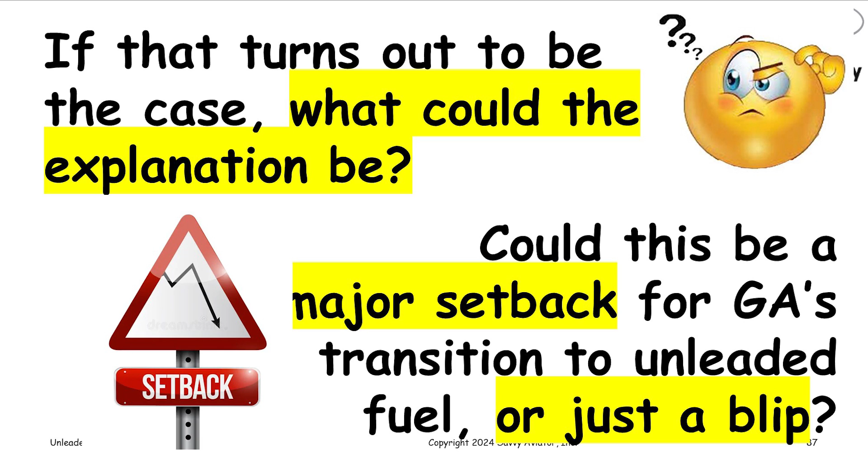But if it turns out that it was an operational problem, then what do we make of it? How can we account for it? Is this, as I said, a major setback for GA's transition to unleaded fuel, or is it just a blip? I started looking at this, and as I mentioned, the Piper Archer engines that use the Lycoming O360 A4M engines,

had a lot going against them, really, if you're thinking about the recession issue. They're among Lycoming's highest compression ratio engines, with a compression ratio of 8.5 to 1. I'm not sure any of the Lycoming certified engines have a higher compression ratio than that. And they use a very aggressive ignition timing of 25 degrees before top dead center, which even before this problem came up, I always thought was pretty darn aggressive timing.

For example, Lycoming originally certified its IO360 engines with 25 degree ignition timing, and they ran into so many problems with high CHTs and detonation issues and so on, that they changed the timing and brought it back to 20 degrees before top dead center, which was very, very conservative. They did not make that change on O360s, only on IO360s, and I'm not sure why. But 25 degrees timing is very aggressive, meaning it increases the peak pressure during the combustion cycle. The compression ratio is very aggressive.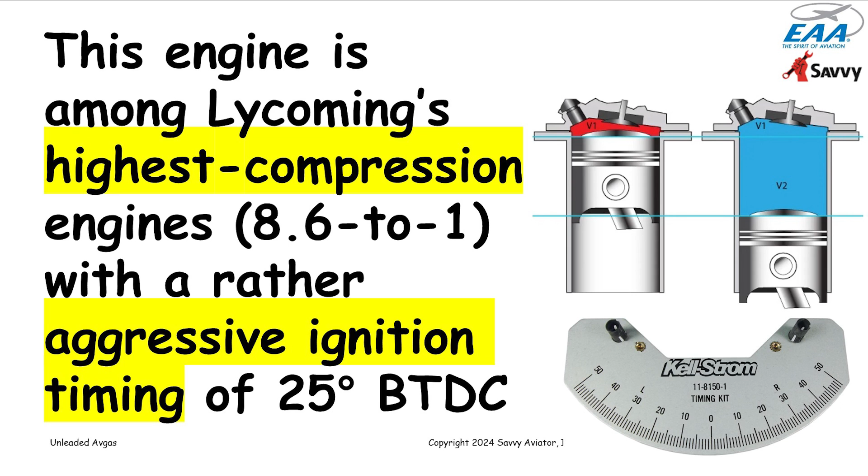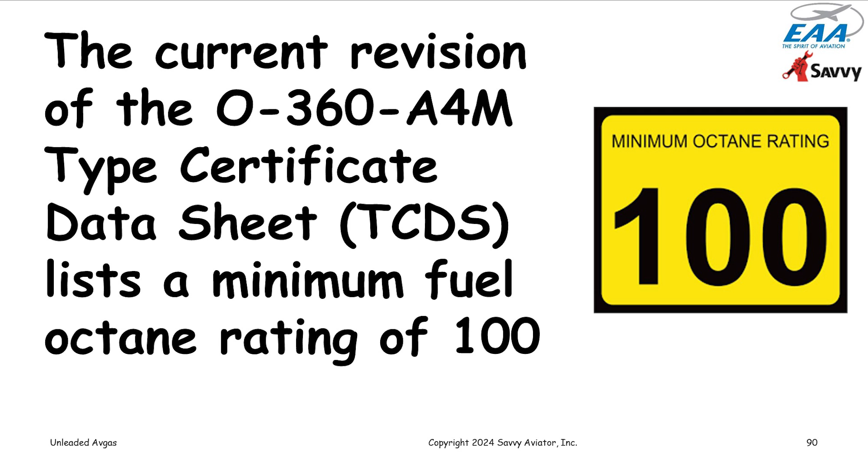And then there's the question of the fuel octane. When I pulled up the type certificate data sheet for the O360A4M engine, which is the engine in the Archer, it says the minimum octane rating is 100 octane. Now, when I looked a little closer, it turns out this engine was originally certified for 91/96 avgas, a grade of avgas that hasn't been available for decades. But that was the fuel it was originally certified for. And then when 91/96 went away, they changed the type certificate data sheet to say the minimum octane requirement was 100 octane.

But yet the service instruction 1070 Alpha Bravo says that it's okay to run this engine on UL94 or UL91.

So the high compression ratio and the aggressive ignition timing, this engine, for example, would never qualify for the auto fuel STC because the compression ratio is too high.

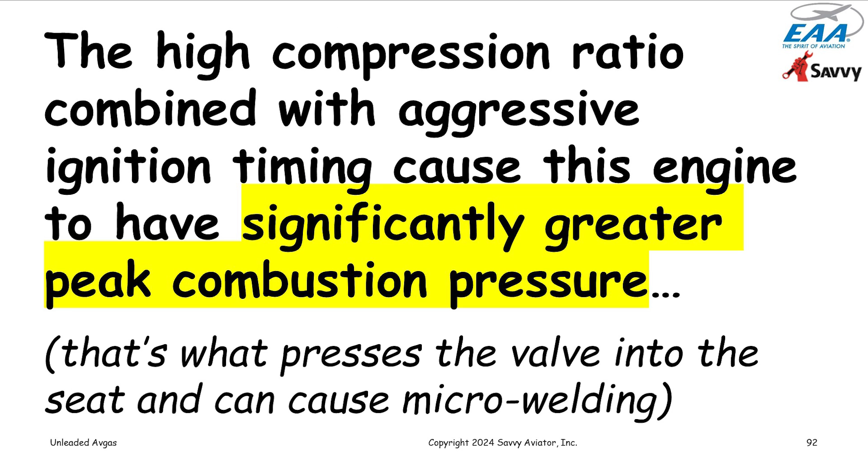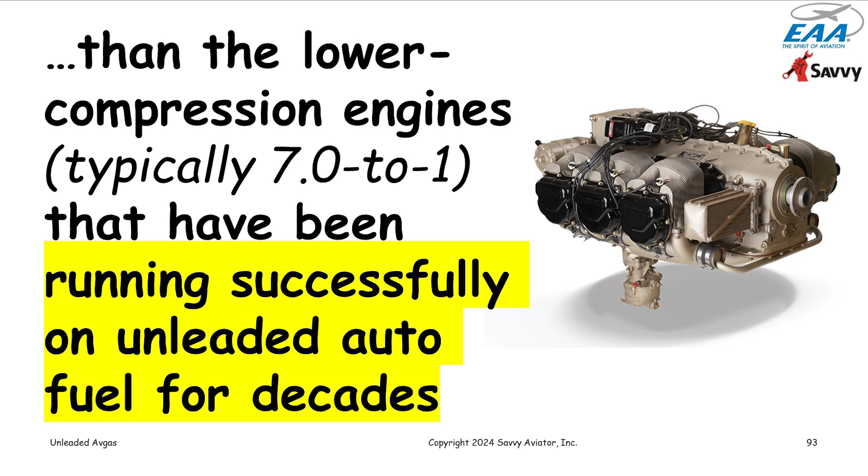And I was frankly a little surprised that Lycoming approved this engine for 94 octane fuel. Reducing the fuel octane from 100 to 94, which is approved by Lycoming, results in even higher peak combustion pressure than when the engine is running on 100 octane fuel. Again, because lower octane fuel burns faster and creates a higher peak pressure.

So somehow it seemed like eliminating the lead and reducing the octane at the same time might have not been the best idea, at least in hindsight.

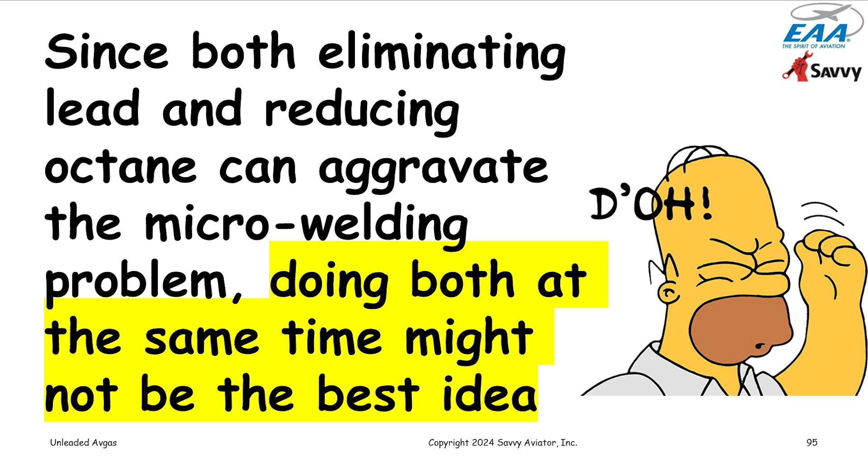And on the other hand, I suspect that it would have been pretty easy to compensate for that reduced octane by retarding the ignition timing a little bit, the way Lycoming did on the IO360s. It would have had to get approval from Lycoming to do that because these are certified engines. But it might have been real easy to compensate for that reduction in octane by making the ignition timing a little bit less aggressive.

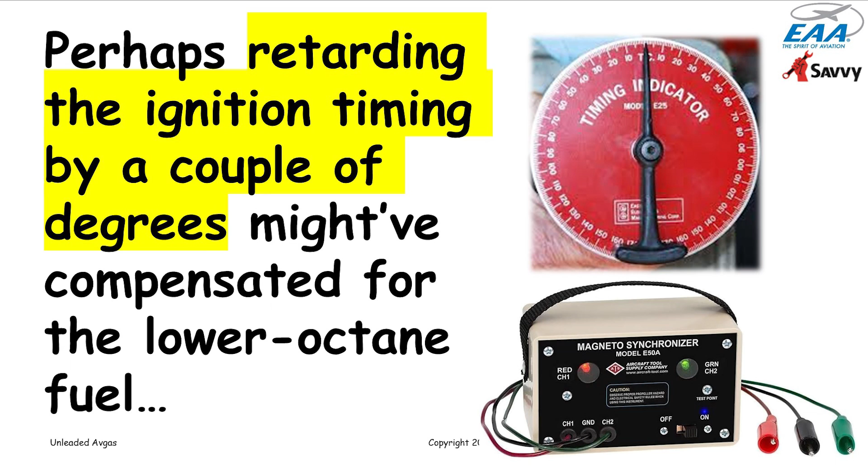And since Lycoming did that for the IO360, I suspect it could have been done for the O360 without any big issues. But at any rate, we've got a lot of pieces to this puzzle, and we don't have answers to all of them.

I'm hoping that it won't be too long before we get to the bottom of all of this and decide exactly what this experience that UND had with the Swift 94 UL, what it means, and how big of an issue it is, and what needs to be done.

My suspicion is it would be probably pretty easy to work around the problem, but that's just my guess at this point. And I think there's quite a bit of research going on to find out definitively exactly what the problem was and exactly what needs to be done to solve it. But I'm pretty sure it's soluble.

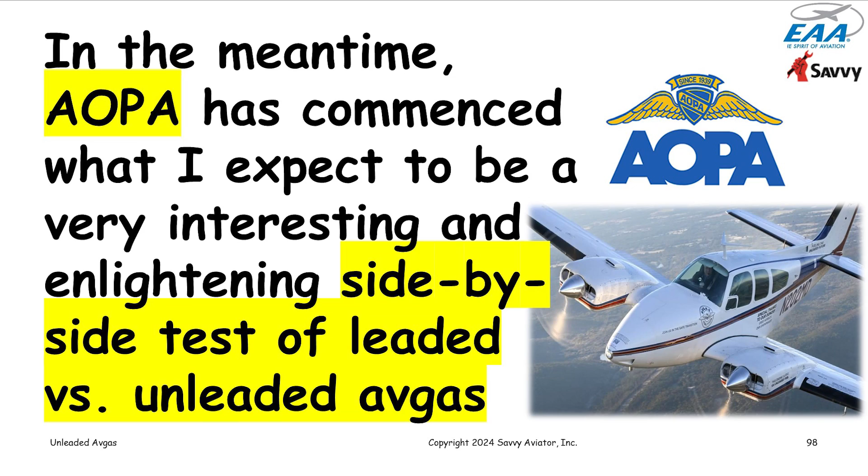In the meantime, AOPA is running a really interesting test that I've gotten somewhat involved in. They have a Beech 55 Baron that they're using to do a very interesting side-by-side test of leaded versus unleaded fuel. They call it the one airplane, two fuels.

This Baron has a pair of freshly overhauled Continental IO520 engines that is being run on the GAMI G100 UL fuel on the left side and 100 low lead on the right side. And of course, both of these engines are undergoing exactly the same operations and so on. These engines were built with 12 new Superior Millennium cylinders, which presumably have hardened valve seats since they're new.

And the plan is to put as many hundreds of hours on this airplane as they possibly can over the next couple of years, and do very, very careful surveillance of both engines.

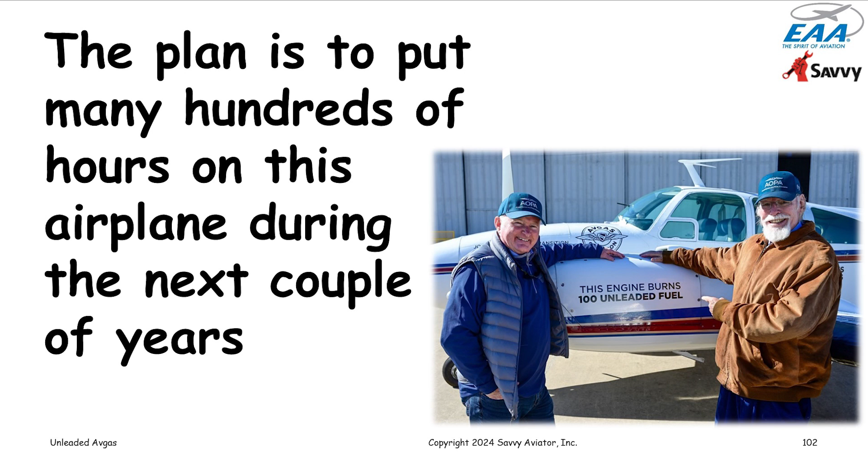And again, the advantage here compared to what was done at UND is that here we basically have a control engine, and then the G100 UL engine. So we have something to compare against, which I kind of wish we had at UND, but this is going to be a pretty precise test.

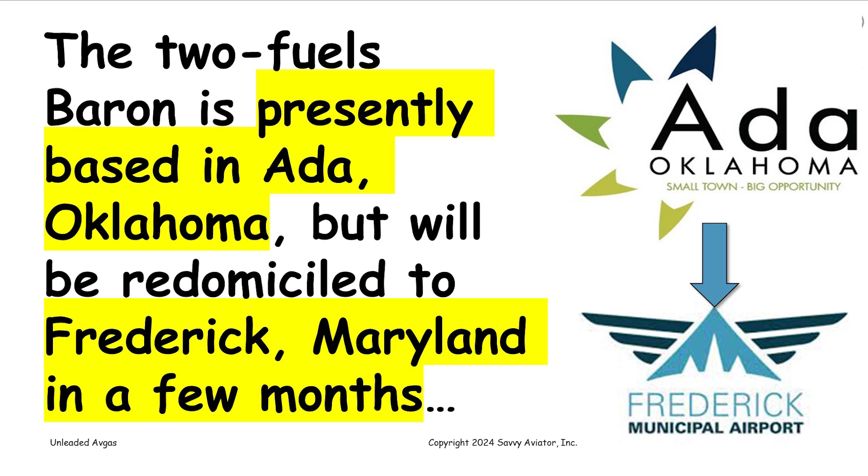The Baron is presently at Ada, Oklahoma, because that's the only place that there's an adequate supply of G100 UL fuel at the moment. AOPA's plan is to move it to Frederick, Maryland, in a couple months once the logistics of getting a decent supply of the G100 UL to Frederick has been accomplished.

Because when it's in Frederick, they've got more people to fly it, and they should be able to put more time on it faster. AOPA asked my company, Savvy Aviation, to manage the maintenance and data analysis for this project.

And so we'll be doing comparative analysis of digital engine monitor data, very frequent and detailed bore scope image analysis of the two engines, laboratory spectrographic oil analysis for both engines.

And in addition, because this whole valve recession issue has reared its ugly head at UND, we created a test fixture that allows us to measure valve seat recession very, very precisely to the nearest thousandth of an inch. And it's not dry tappet clearance. We're measuring the valve directly without getting any of the rest of the valve train involved. So it's a very isolated and very precise measure of valve seat recession.

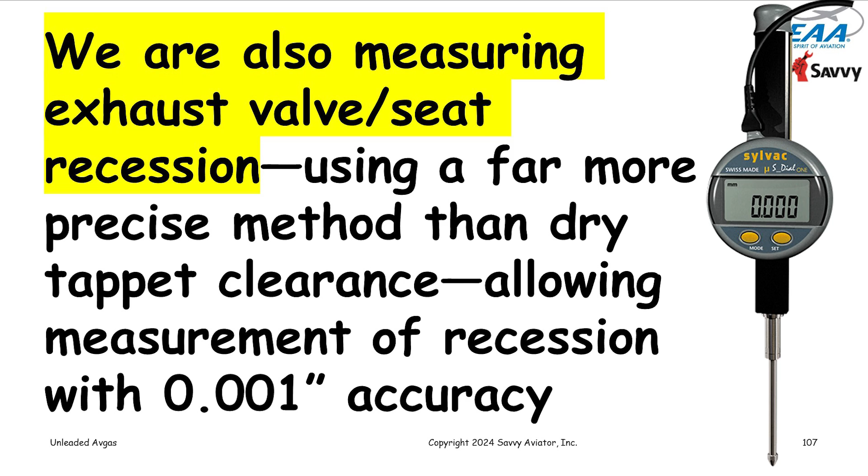About 2 weeks ago, we took the baseline measurements on both of these engines, and we're going to be remeasuring periodically so that we can keep really close track of valve seat recession in these two engines, to see if there's any difference between the engine running on G100UL and the one running on 100 low lead. Since these two fuels have the same octane, where the unleaded fuel is not a lower octane, they should be a very pure and well-controlled test of the effects of removing lead.

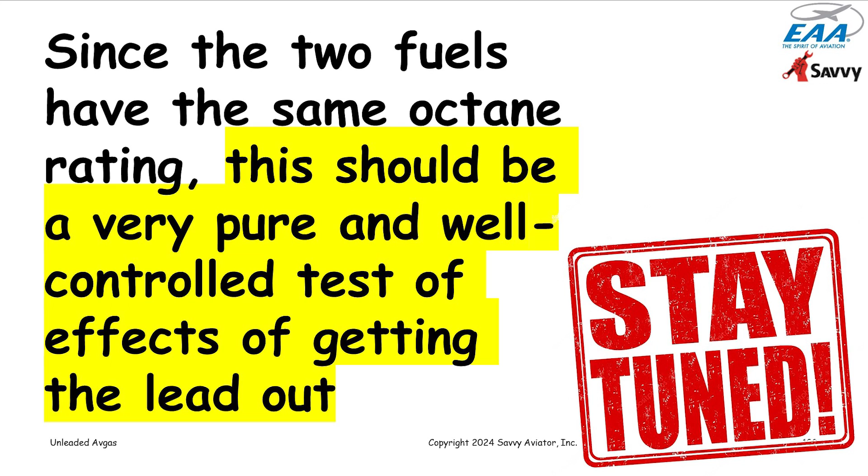So stay tuned for the results of the two fuels in the Baron, which we'll probably be publishing articles about in AOPA Pilot Magazine from time to time as the test progresses. And stay tuned for more information on what was going on at UND, because I think it shouldn't be too long before we have some better answers there. I just wanted to bring everybody up to date on what we know and what we don't know. It's like a whodunit without the last chapter written yet, but it's a very interesting story. So Tim, that's all I have.

I can hear my voice starting to give out here. We'll give you a little bit of a break now while we tee up the questions. That was 108 slides, so that might be a record, Mike. I think so, as is the attendance. We've had a great attendance, I think over 1,600. Fabulous.

Okay, let's start in with John's question: Are you seeing valve seat recession in the SavvyAnalysis pool of aircraft?

We've not run into any valve seat recession problems. No, not really. But again, we don't measure valve seat recession as a matter of course. We're doing this on the AOPA Baron now just because the issue has come up, but this isn't the kind of thing that normally gets measured. So if there was really gross valve seat recession, like what we saw in that picture I showed you of the Seminole valve, you'd look at that with a borescope and say, 'Oh my God, what happened there?' That was a huge recession.

But minor valve seat recession, nobody would even notice. It would have to be bad enough to start causing valves to burn, and even in that case, you'd see a valve burn, but unless the valve seat recession was very, very pronounced, nobody would associate it with recession. They'd just say, 'Oh, the valve's burned, we need to do something about that.' So it's really hard to say. This isn't something that is routinely measured by anybody, so it's kind of hard to answer how much recession is normal and how much before we have to worry about it. None of that is really something that we know about.